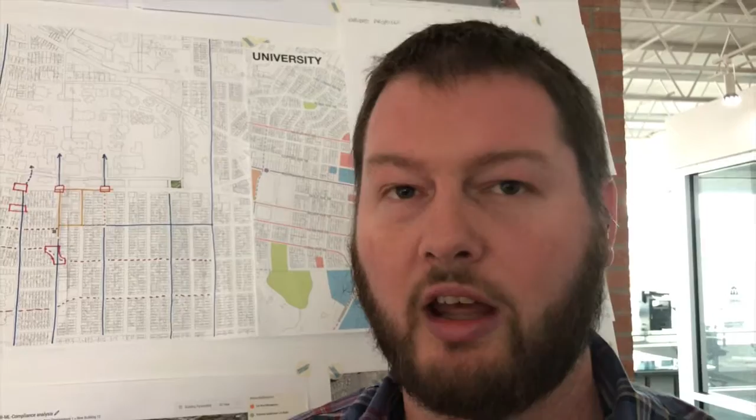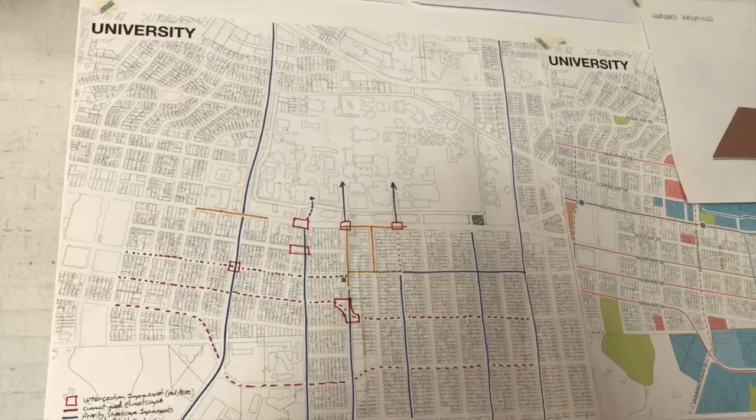So the area in general, this is Central here. University of New Mexico is here. We have University Heights and Silver Hill, and I'm really looking in this area and finding ways to both better stitch together the university and the neighborhoods with each other, and looking at the commercial areas. There's a commercial district here on Harvard, potentially along Yale, and how this becomes a really strong neighborhood center for the neighbors, and the potential for another Main Street segment over here across University in this location.

This diagram shows some priority pedestrian and bicycle connections. North-south is really important to reestablish throughout the area. There are some existing east-west connections, such as Silver, which currently has a bicycle boulevard, but we don't really have the fabric going north and south, and also connecting from South Campus of University of New Mexico to Central Campus. And there's places where we want to make sure, these red boxes for instance, that pedestrians and bicycles can cross streets safely. Currently there may be some issues.

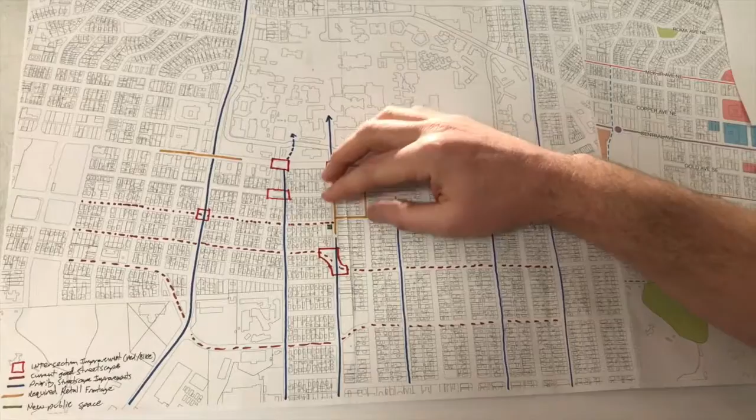We know that there's a lot of students living down here, faculty, and people visiting the presentation halls and lectures and other events at the university, so that movement between the two is very important. That's one of the main focuses, and then finding out a lot more from the neighbors what they want to see in that neighborhood change.

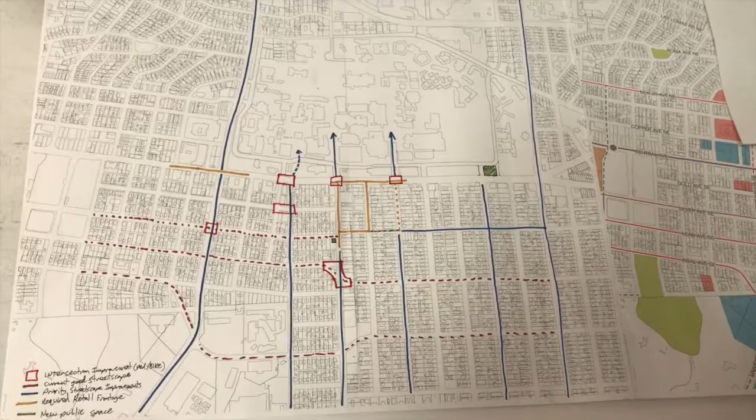So they've historically, since the late 70s, been promoting the right sort of change, and over time a lot of students have moved into the neighborhood, and there's been a lot more renters, and that's caused some problems. There's been more student housing developed on campus, and that relationship is starting to change.

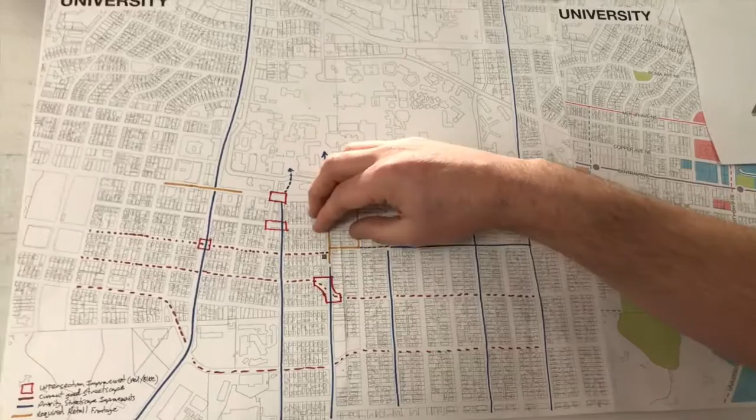The university is interested in developing more housing on campus. We're looking at some sites along the edge as a means to stitch the neighborhood together, and then looking back here and saying, well, what needs to be fixed in University Heights to help stabilize this neighborhood in this seam of Yale, and how that comes together between Silver Hill and University Heights, and the same situation in Silver Hill, which has an active historic district.

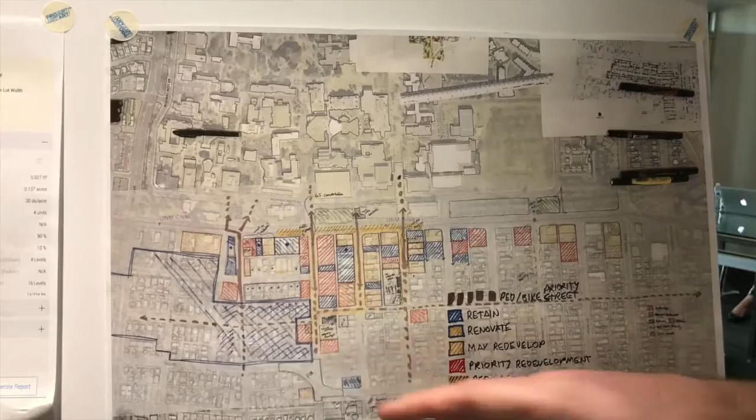So we spend a lot of time actually learning, and it's been a pretty long learning process because the place is complex. This diagram we started in a few other districts as well, to identify the most important buildings in the community, both historically active businesses and historic districts. In blue, this area, for instance, is the Silver Hill Historic District, which has a very strong historic character of homes and is very active.

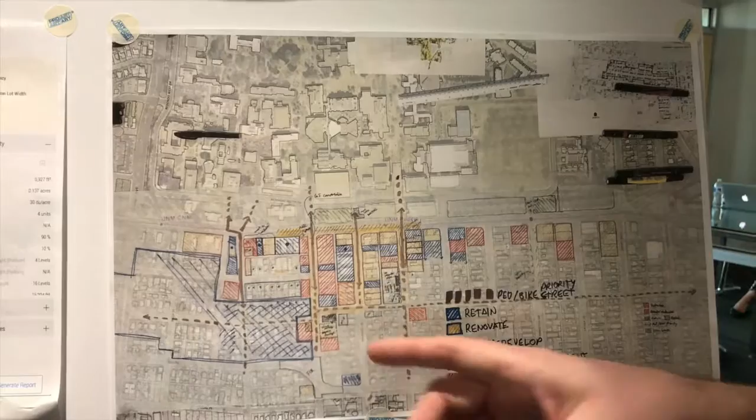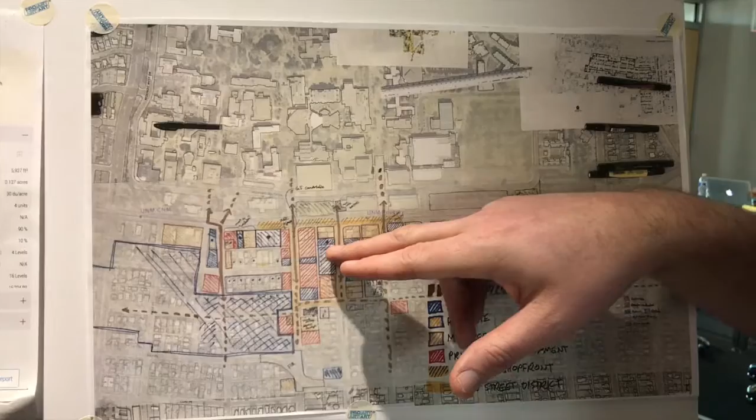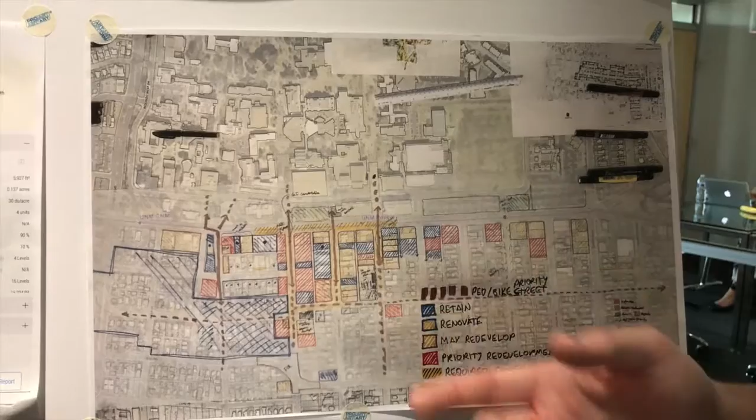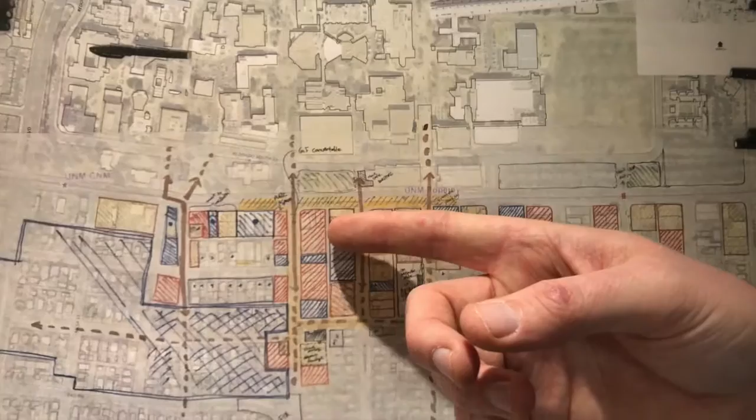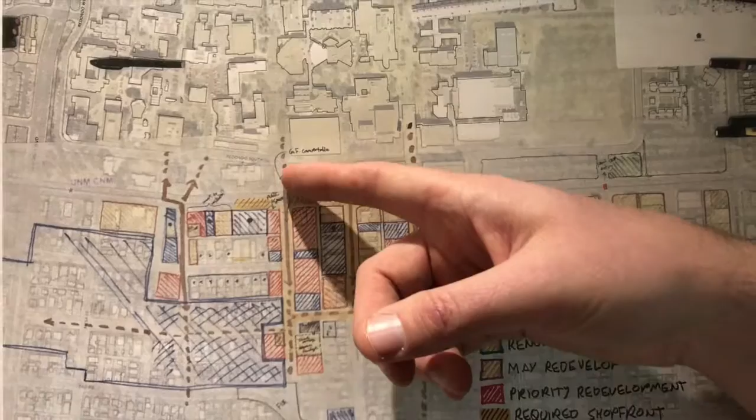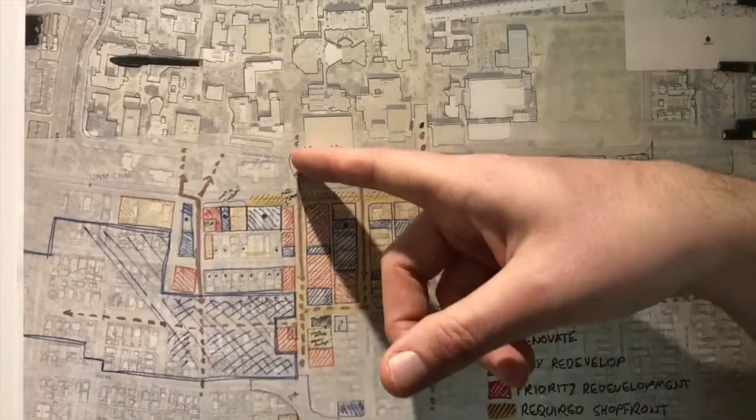Through this we've really found that while Harvard is currently active, Yale has a lot of potential as the ART comes through and we densify with housing at the northern end of the neighborhood, that this becomes a much stronger Main Street, and we can connect to Harvard and really make a district.

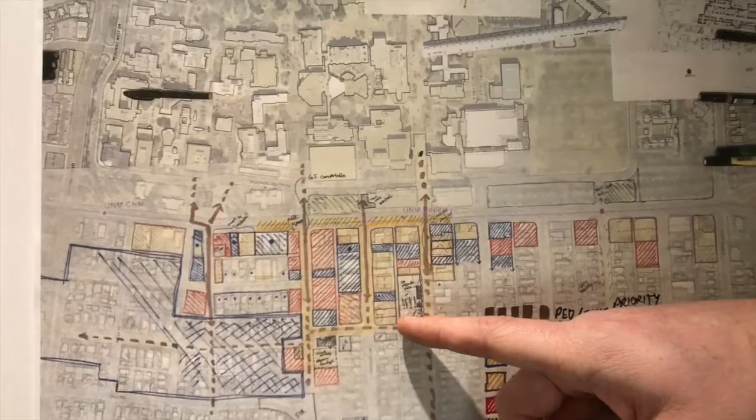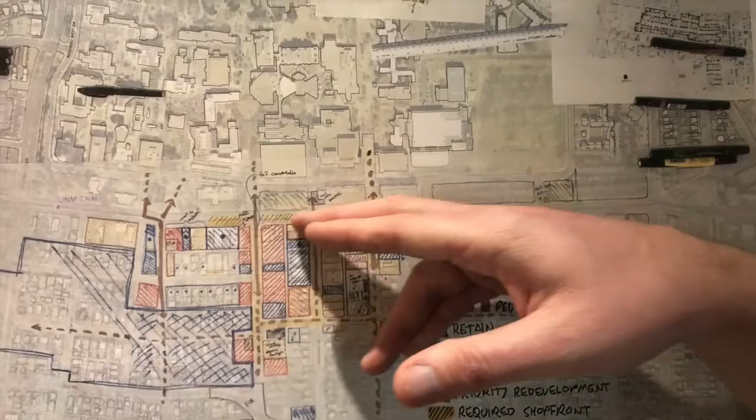We have some issues over on Cornell because of the existing substation and the post office, which really don't have a reciprocal relationship with retail on both sides of the street, which is interesting. It's been brought up that that's the same case along Central here, because the university isn't active 24/7 on this edge, so retail doesn't do as well here.

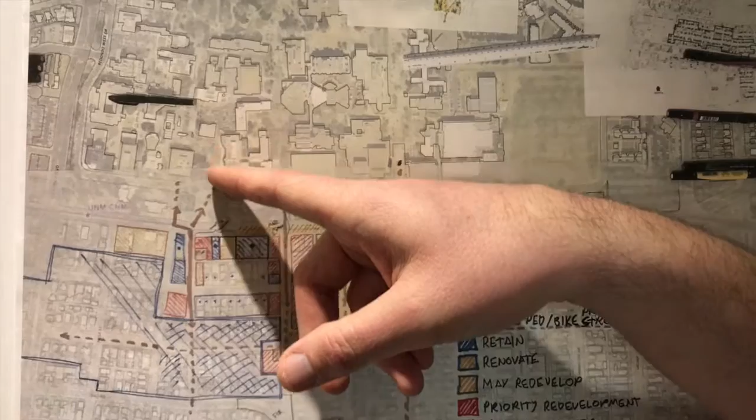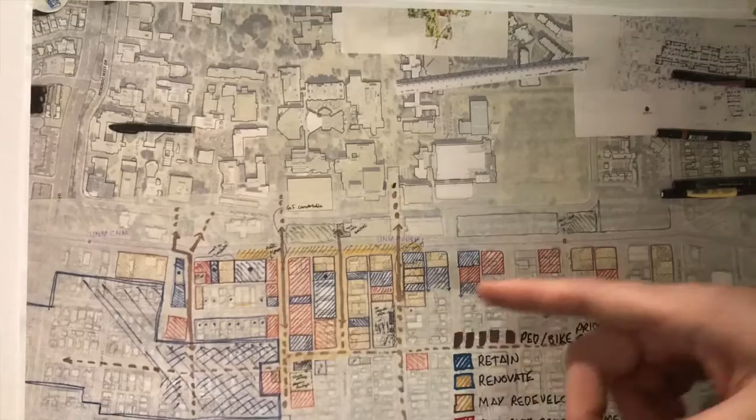So we're really looking at perpendicular main streets. We're also looking at these brown lines, some important connections. The university has indicated that they have an interest in connecting by bike on Buena Vista, so we have to look at really this intersection of Central and how you can get as a pedestrian and cyclist into campus well. They're also looking at relocating an entrance signal here for the university.

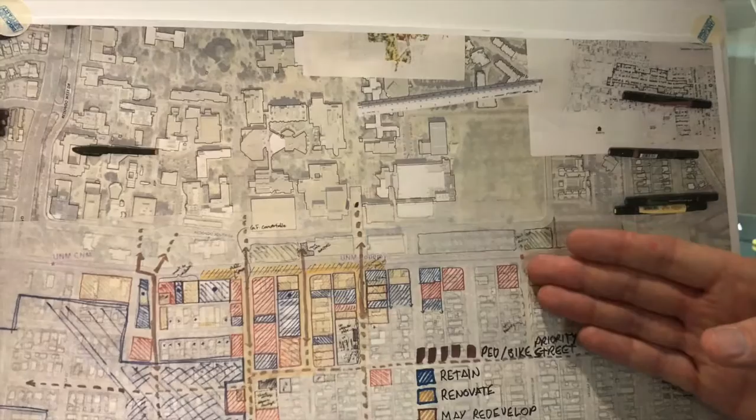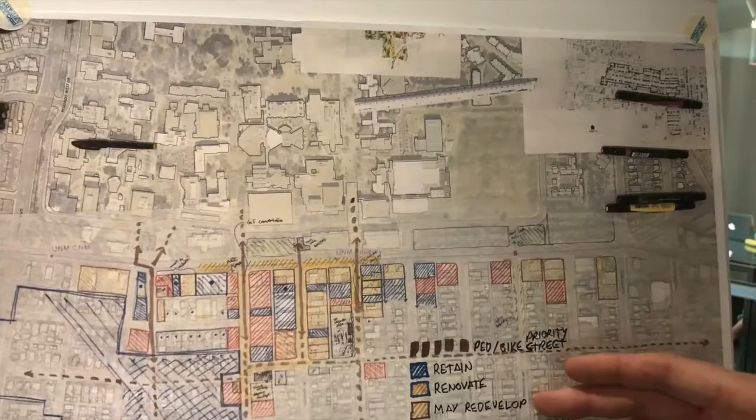So our questions then are: how do we prioritize the crossing? How does this act as an entrance? Currently this is all parking lots, so as we think about the redevelopment of the edges, how does that entry work? And then what is the character of Princeton, which is where that connection would come through. And then more recently, there were brought up some additional north-south connections for bikes.

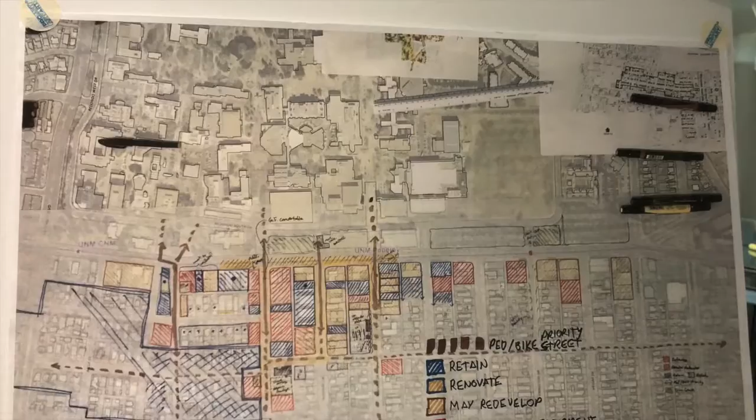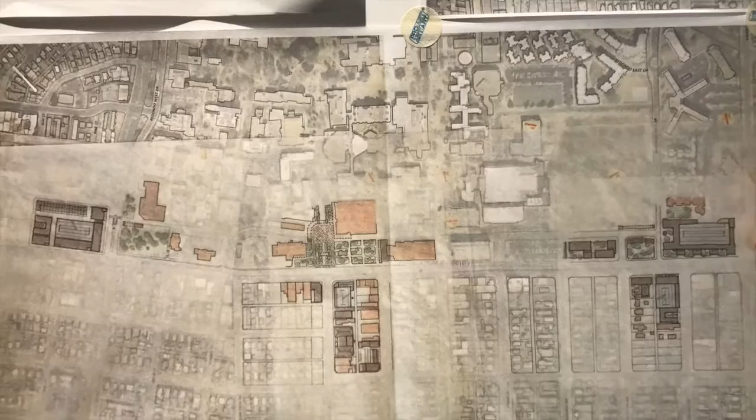So we began to look at some specific sites for redevelopment in this area. This is the eastern edge of campus, with the university here and central here. We looked at some potential student housing with structured parking. The university knows they need more parking on campus, but they want to pull it off surface lots. At the same time, Nob Hill's Main Street district is directly adjacent, so parking in this location could serve some of the lacking parking in Nob Hill. This is a really opportune site for development, both for student housing and parking.

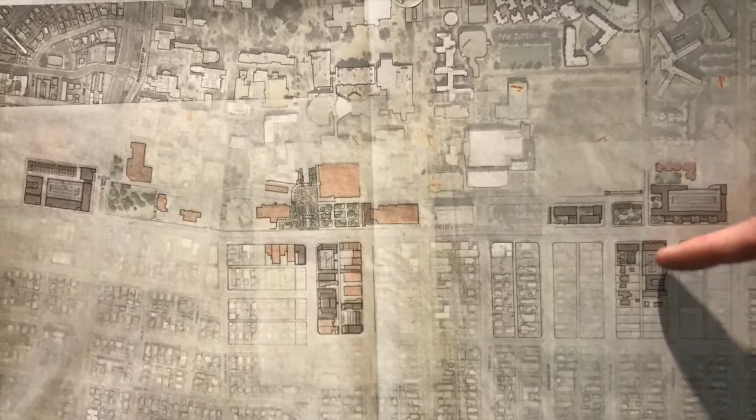We started looking at ways that underutilized sites across the street might work together to share parking, so the burden goes on one site where structured parking could fit, while other adjacent sites are freed from that parking burden. So we're looking at infill sites in that sort of configuration.

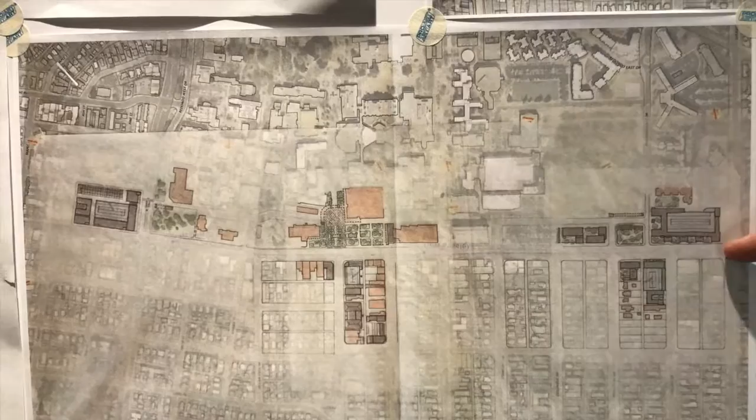Another thing that's really important to the process is limiting where retail lies, and we don't think retail is strong on this portion of Central. It might pick back up in the corner, but the Main Street is really over here, existing on Harvard and on Yale.

Now in this location, because vehicular traffic is moving to the new entrance potentially on campus, we're looking at what happens with this entrance when it becomes a strong pedestrian and cyclist entrance, but not so much a vehicular entrance. So we can recapture space, make some plazas and greens, and potentially this is a bookstore with a cafe, but the back of house here is loading docks and garbage.

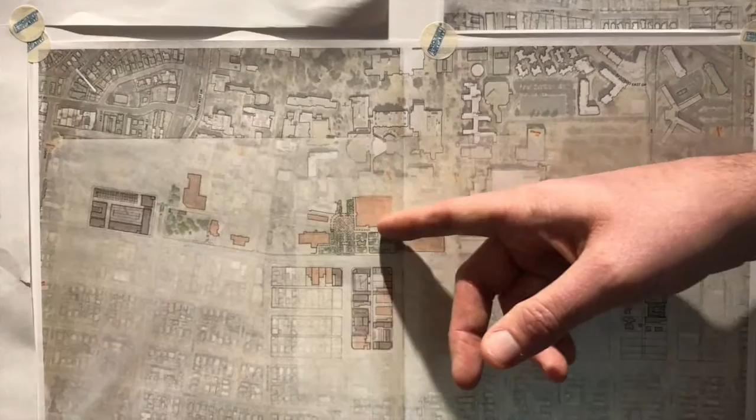We thought we could line that, move the cafe to this edge potentially, and reimagine Yale Park, which is a historic park that's had problems over the years. At the same time, the university is building a new building where the existing reservoir is located. So we see this as a great place for a new entrance to campus and a way to reimagine the park, connecting directly across to the neighborhood center on Harvard and Yale.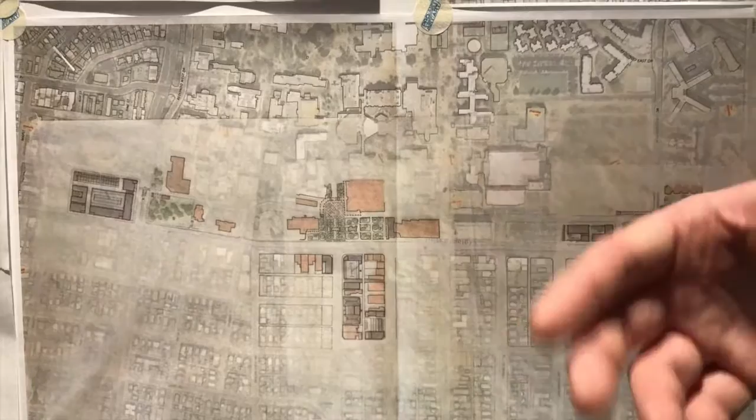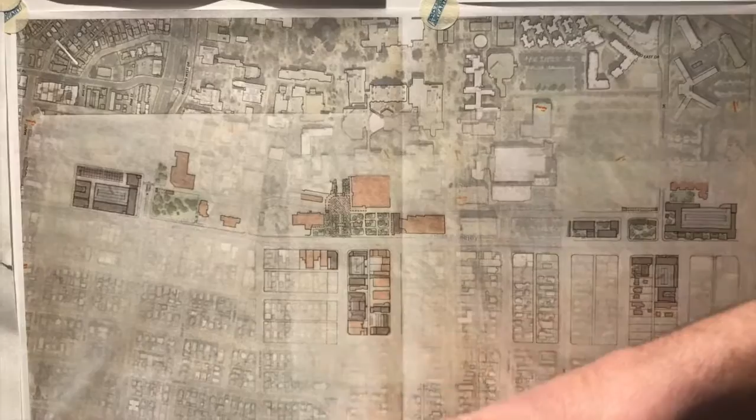We're thinking about cross connections between the two streets so we have greater pedestrian density to support the retail district, looking at specific sites and what sort of redevelopment could infill them. We'll soon look at the future of Yale a little further south, analyzing a dangerous intersection previously identified in the shopping center.

At the west side of campus, there are two parcels that the university owns, and they've suggested they're interested in developing some parking, potentially some retail, and housing. So this looks at how that might be configured, and how we might reimagine the entry green, which is beloved on campus but not really well connected.

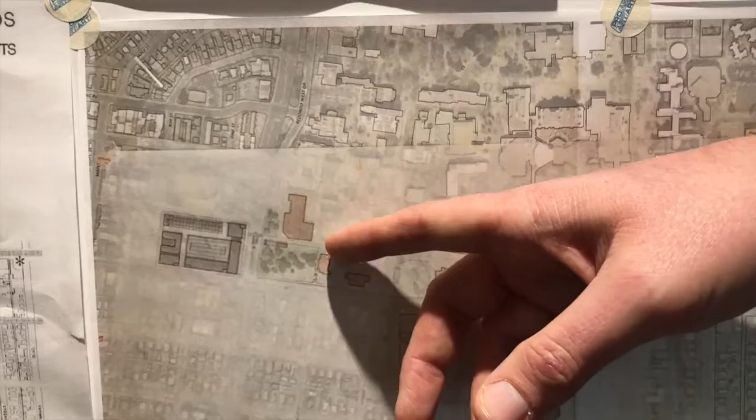So we'll continue to look at this—what happens if Redondo Drive doesn't cut along the edge, and we actually have a direct relationship between the green and the adjacent buildings. We're also looking at what the detail of streets is like and how those work for businesses or houses around them.

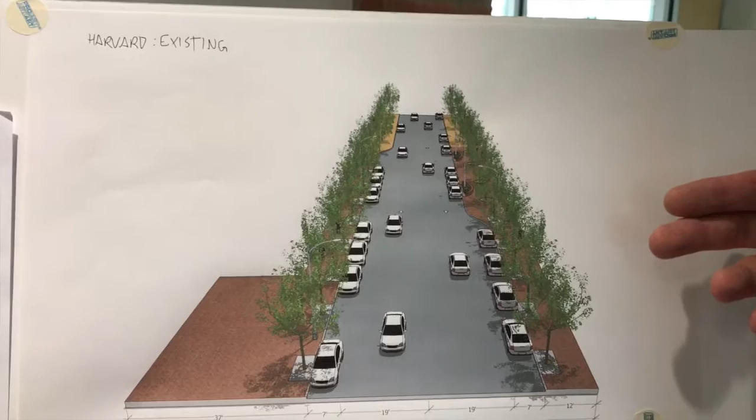This is a look we've just started at Harvard. We realize that Harvard gets really wide. This is the existing street section from Central to Silver, and you see the sidewalk jogs out in two places at different spots from each other, and once you get to Central, you have parking, but basically 19-foot wide travel lanes, which is totally unheard of. It's a big waste of space.

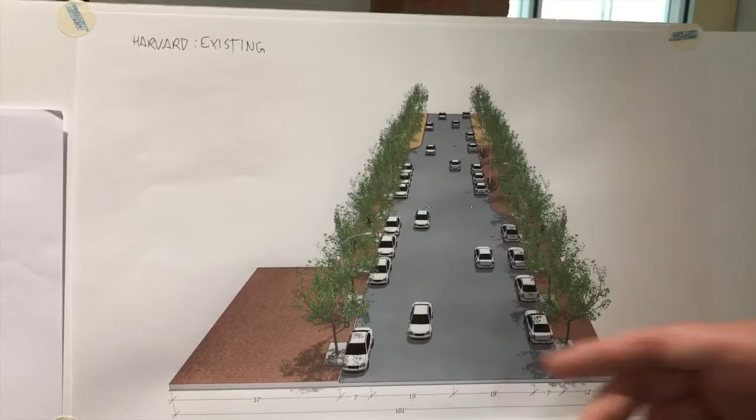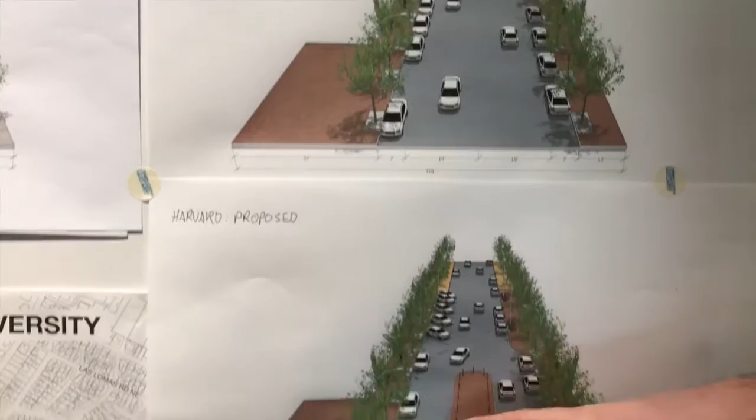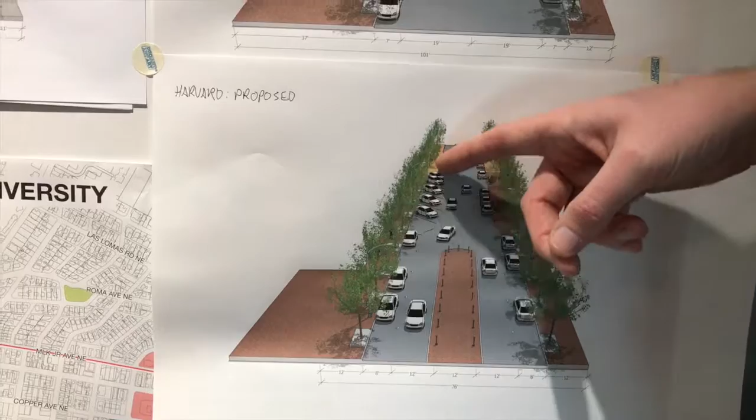Here, interestingly, there's a small plaza carved out on one private property. So we started to think: what if we capture some space back in the center and allow people to occupy that and move the cars around. We have a little bit of extra space here—we can get some angled parking to increase parking on the street. We're working on another idea which takes the street and shifts it along the edge, widening this plaza so it's a much more meaningful space.

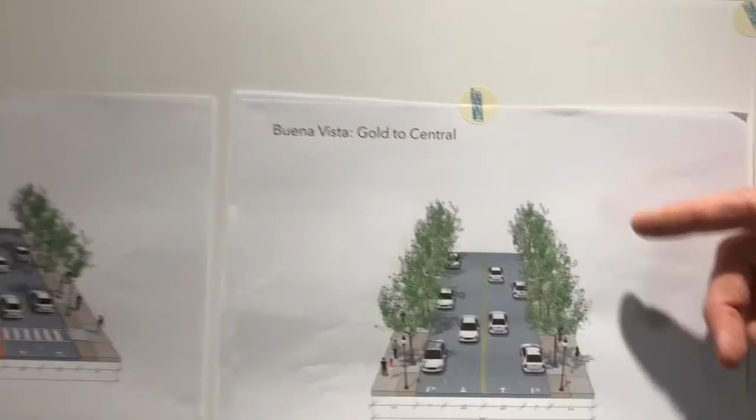So we're continuing through those ideas. We're also looking at some other streets, for instance Buena Vista. It doesn't have a very good condition on the edge, but the inside is fine. It needs some striping to define travel lanes and parking, but how might the streetscape look?

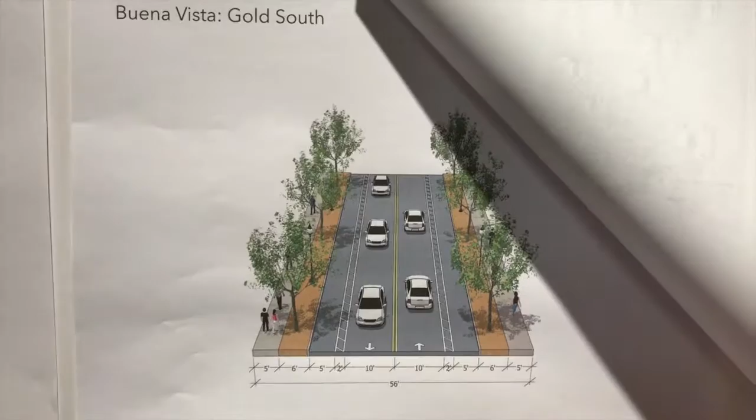We had looked previously at ideas of accommodating bicycles on Buena Vista because of the desire to connect South Campus to Central Campus. So this is a section that provides a buffer and a dedicated bike lane on the street.

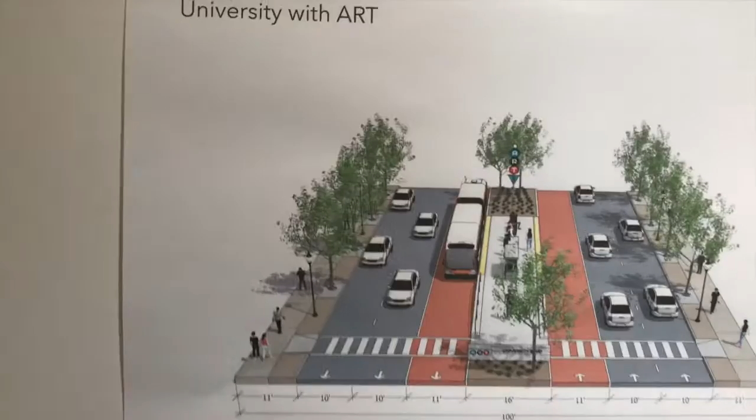There's also phase 2 of the rapid transit system that will go up University Drive. Residents feared losing their treed medians, so this looks at retaining those medians, getting the bus on the street, and still retaining 4 travel lanes. But we found that the current travel lanes are too wide—at 12 feet—and when we reduce them to the right size, 11 feet for buses and 10 feet for cars, we actually gain enough space to plant trees.

Currently, the street configuration has sidewalks with cars right next to it driving very fast, which is unsafe for pedestrians. So this is one way to address this, and we're going to take another look at having the bus on the outside lane instead, in a similar configuration.